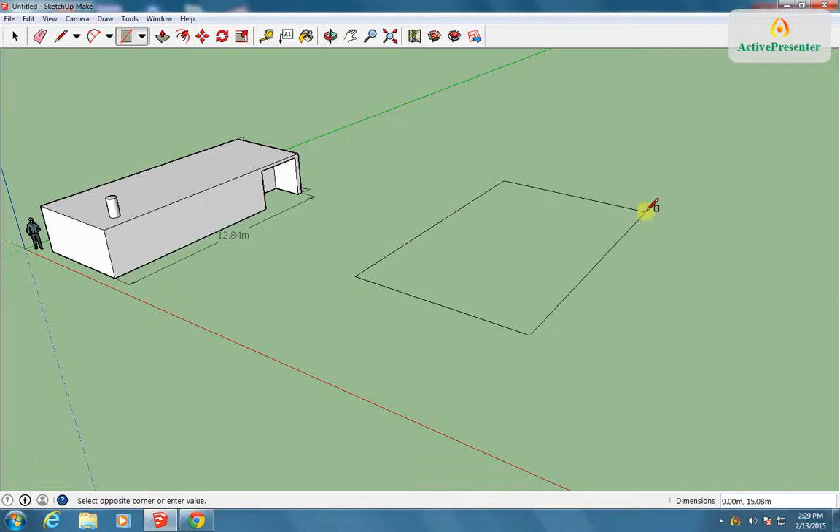So for this one, I'm going to start with a relatively simple shape. You may remember me showing how I draw a rectangle and then use my push-pull tool to pop it up, and so I basically have a box. And what I'm going to create with this one is a peaked roof. If you look around at a lot of houses, they don't just have a flat roof, it kind of forms a peak at the top.

And so let me show you how I do that, and this might inspire you to do some other advanced shapes of your own. So the first thing I know about a peaked roof is that the peak needs to be right in the middle of my roof. And so to create that middle portion, I'm going to use the pencil tool. And this tool lets me draw, instead of an entire shape, individual lines.

And I have to be careful because I can't start this line from just anywhere along here. I need to put the line right at the midpoint of this edge. And you'll notice when I get close, all of a sudden my mouse kind of snaps to the midpoint because it knows that that's an important spot, and it turns blue. And if I hold it still, I even see the word midpoint appear. So I'll go ahead and click there, and I am just clicking and then releasing my mouse.

Now I'm going to move down to the other edge, and you'll notice if I kind of follow the line straight, even if I move my mouse a little bit to the right or to the left, it can kind of tell I'm wanting to do a straight line. What I really don't want to do is just go way over here, because then I'm off center. And once I reach the edge, if I have indeed hit the midpoint, I should once again see one of these blue dots, and it says midpoint. So I will go ahead and click and release one more time.

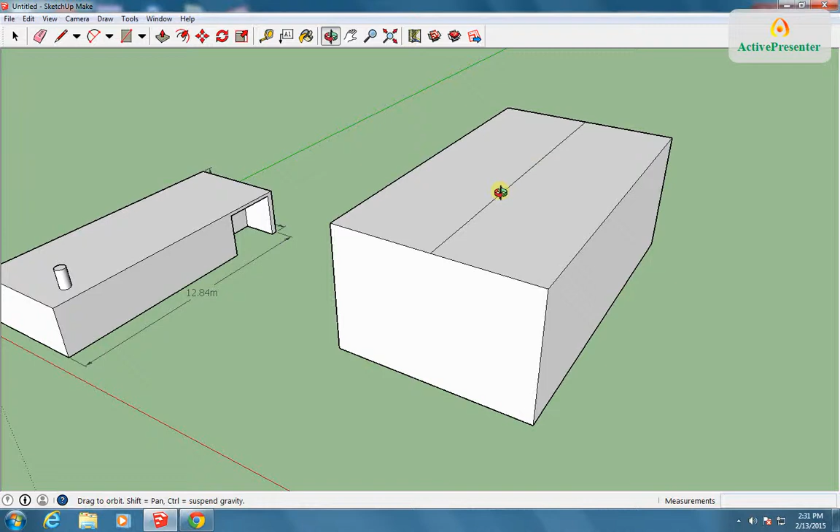And then I'm going to make sure that for my view, I want a view like this, where I'm kind of looking down at a 45-degree angle. I can see both the front and the side. I can get a good view of the top, and it's not hitting the edge of my screen up here. There's plenty of green space around here for me to kind of move and look around.

Alright, now I'm going to go back up to my manipulation tools. Remember how we used the push and pull just to make things 3D? Well, here's a new one we're going to use. This one is called the Move. It has 4 arrows, and this lets me grab any edge or corner or other part of the shape and kind of push or pull on just that one little part.

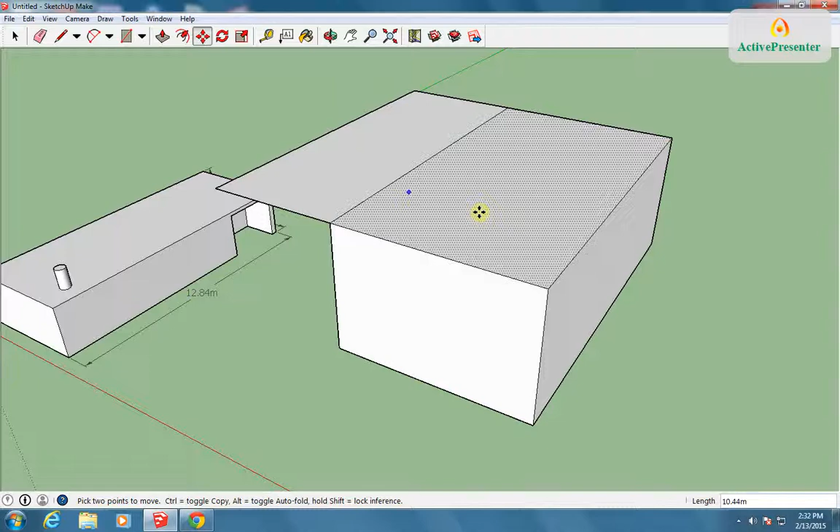And I want to be careful with this one, because let me show you something real quick here. If I just grab and click way to the side, you'll see how it suddenly made this weird, I don't even know what that is, some sort of shelf sticking out to the side. I'm just going to undo that. So when I click on it, I'm going to make sure I'm right on this line that I've made in the middle, and very carefully I'm going to start moving my line straight up.

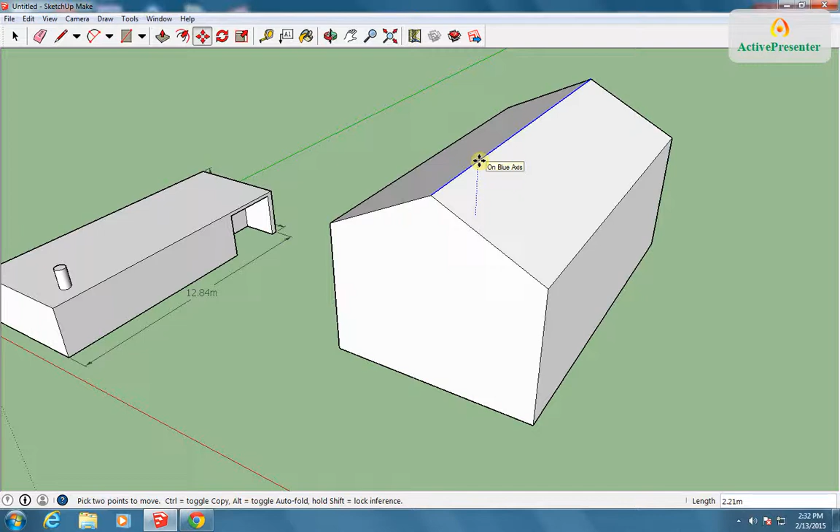And if I'm doing it correctly, you'll see how it says on blue axis. That's where it can tell you're wanting to pull it straight up, and so that blue dotted line you see below it is the blue axis. In other words, that's our Z axis, and it's keeping things nice and straight as I pull it up. And once I think it's about high enough, I'll let go, and to check my work, I'll use that orbit tool again, or maybe the hand tool, just to kind of move around and take a look at my shape, and it looks like I've made a nice peaked roof.

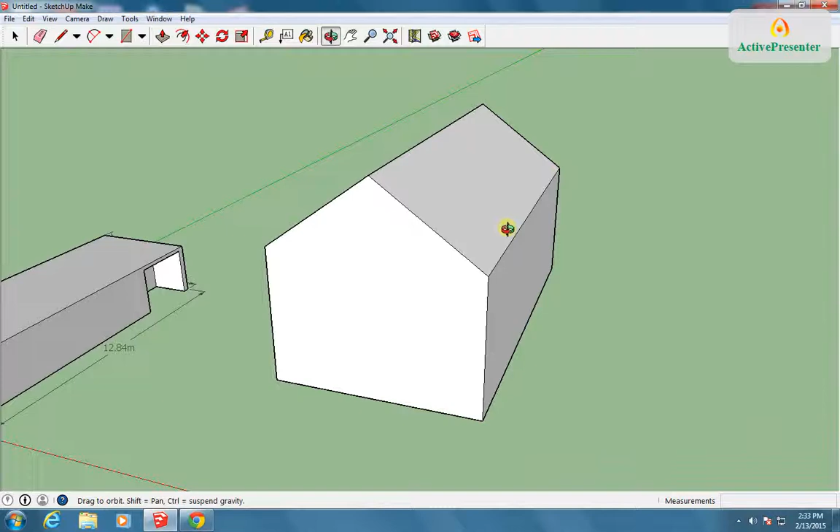So there's just one example. Now, where else you can go when you start using a combination of some of these other tools is really up to your imagination. I'll maybe show you one more if you're still watching in the video. So consider this bonus content.

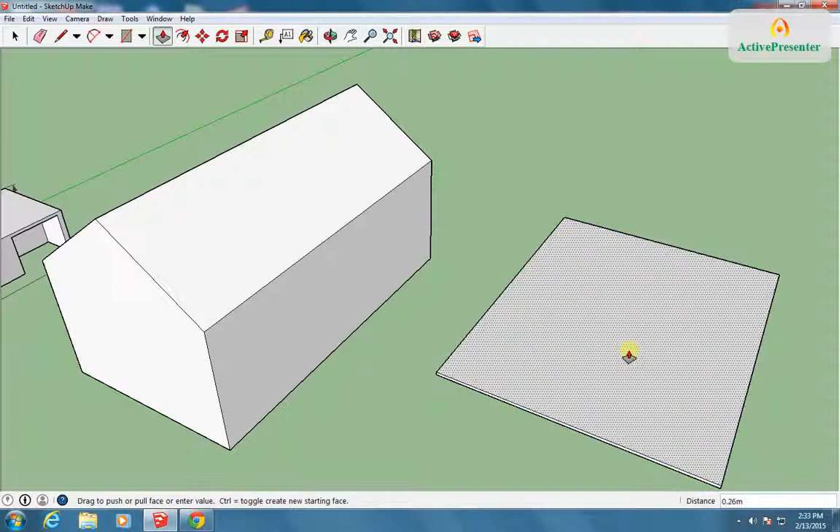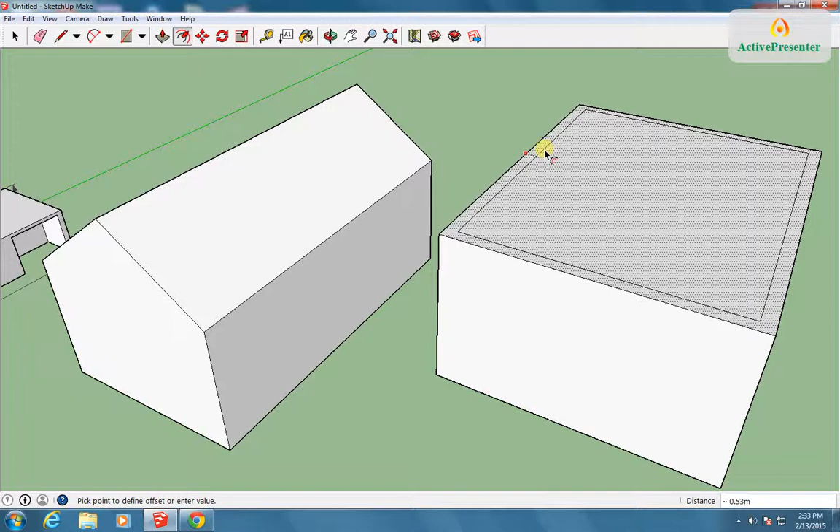Let's say I'll start with more of a square in this one, and we'll make it 3D. And I'm going to use this one right here called the offset tool. What's cool about this one is that when I click, it makes a rectangle within the existing rectangle, but you'll see as I draw it out there, it's going to stay even with all of the edges. And so what's great about this is I can get it to an appropriate spot and then use my push-pull to pull up. Maybe I'm going to do a tower where each section keeps going up.

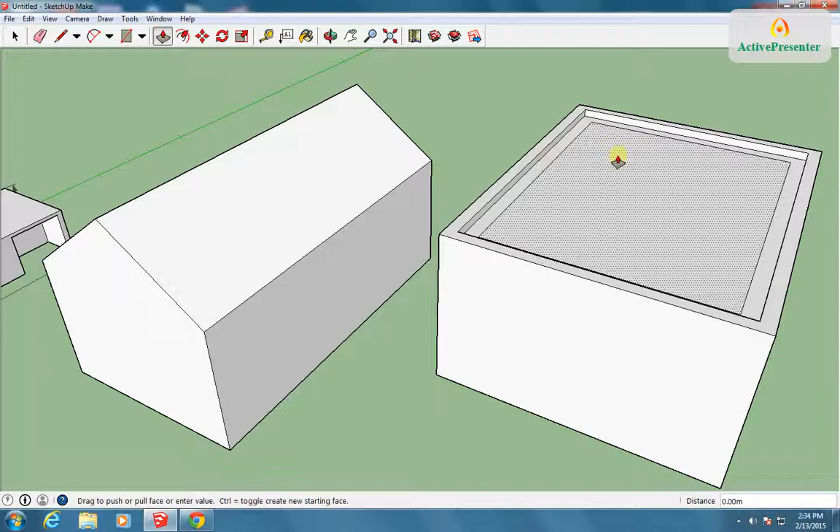Or what a student discovered a couple years ago is if I push it down just a little bit and then repeat the process. Whoa, there we go. Make it almost to the edge again, and I'll grab and push that down again. I'm almost getting something that kind of looks like bleachers here in my building. And so I've had some pretty cool athletic stadiums built over the years by using a technique kind of like this. You could even do the same thing with a big circle, and get something looking like a big amphitheater. So there's just a couple ideas, and see what you can do with those.